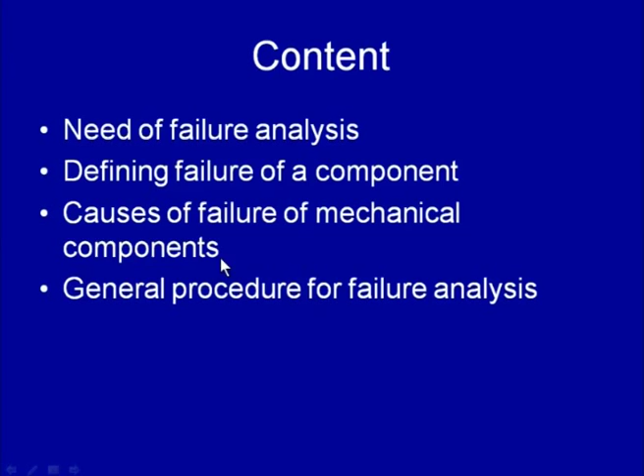So we will be starting with this presentation, which will comprise the need for failure analysis. This is the first part, and then defining failure - when can we consider that a component has failed - and the causes of failure of mechanical components, and the general procedure for failure analysis. In this presentation, mainly we will be taking up the approach used for failure analysis of mechanical components, and especially the metallurgical failure of mechanical components.

So why do we need to carry out failure analysis? We know that whenever failure of an engineering component takes place, services are disrupted, and the public does not get those services on time as per requirement. So to avoid such reoccurrence of failures of engineering components during service, it becomes important that a thorough investigation of the failure is carried out, so as to establish the primary factor or other important factor that has contributed towards its failure.

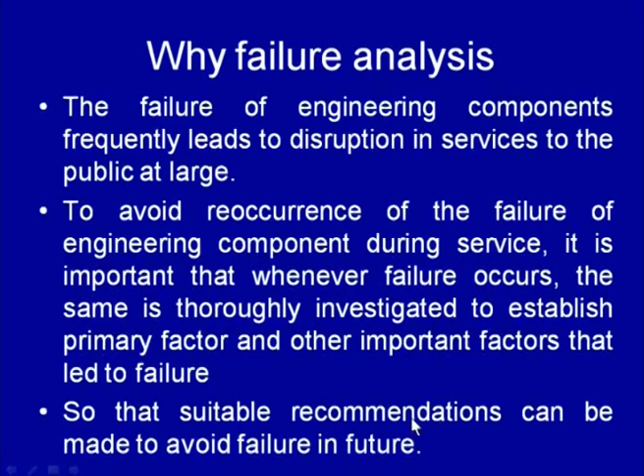And once it is established which factors have contributed towards the failure of a particular component, proper precautions can be taken to avoid the recurrence of failure of that kind. Once the failure investigation reveals the primary causes and important factors that have led to the failure of a particular component, suitable recommendations are made so as to avoid their failure again in future.

What it involves is basically a systematic approach or step-by-step methodology used in failure analysis, which helps in establishing the sequence of events which have led to the failure. At the same time, it also helps in establishing the primary factors and causes which have contributed towards the failure of a particular engineering component. So failure analysis is a systematic approach of investigation to establish the important causes of failure, and to do this it becomes worth familiarizing ourselves with the fundamental causes of failure of mechanical components, and the general approach we can use for failure analysis and prevention.

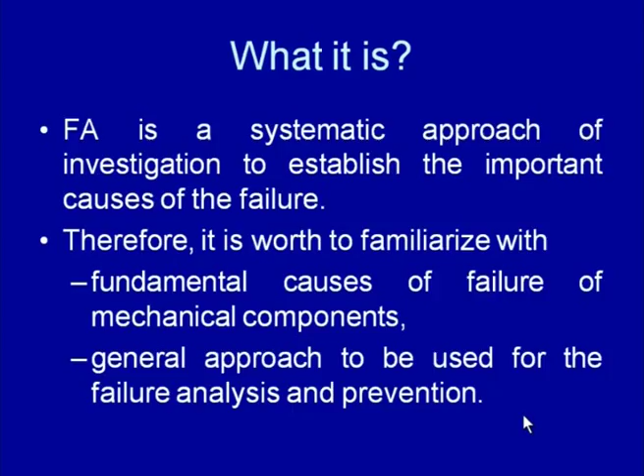So the fundamental causes of failure of mechanical components - there are certain factors that usually contribute towards the failure of mechanical components, and it becomes important to know what those factors are. These factors are mostly related to the design of the component, the material used for fabrication of that component, the manufacturing process used for development of that particular component, the processing parameters used for manufacturing that component, and the service conditions under which the component has performed and subsequently failed during service.

So it becomes important to look into the mechanical component which has failed, and what are the common causes as far as mechanical failure is concerned. So we will be talking about some fundamental causes of failure of mechanical components. Apart from that, we will also be looking into the step-by-step approach used for failure analysis of any metallurgical failure of a mechanical component.

So, in general, an engineering component or assembly is considered to have failed under the following three conditions. What are the situations when we can say that a particular assembly or component has failed?

There can be three kinds of situations when a particular component is inoperable, meaning it is not able to perform the intended function, then we can say that component has failed. Or when the component operates but does not perform the intended function, it is operating but not giving the desired results, then also we can say that component or assembly has failed.

Or when the use of a particular component compromises significantly with the safety and reliability during service, under those conditions also we can assume that the component has failed. For example, the crack in a particular component has grown to such an extent that its further use can compromise the safety and reliability of the component in service. Therefore, either it should be repaired properly or replaced in time.

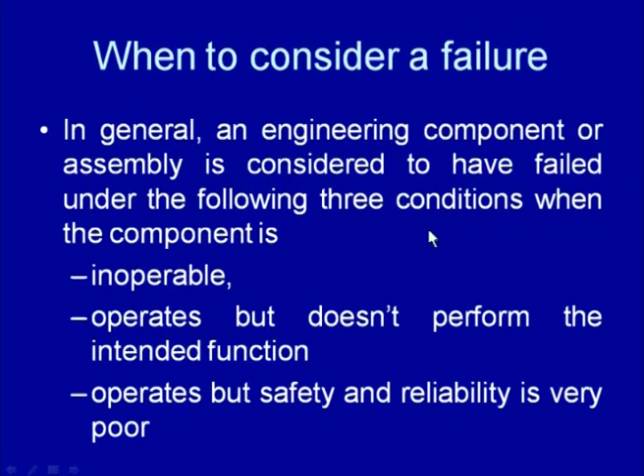So these are the three conditions under which whatever kind of component it is, whether it is a weld joint, a part, or a particular assembly, the component can be considered to have failed. As far as mechanical or metallurgical failure of the mechanical component is concerned, there can be three or four kinds of situations where we can consider that metallurgical failure has taken place, and it can occur in many ways.

Say when the weld joint or mechanical component is subjected to elastic deformation beyond the acceptable limits, and this is adversely affecting the performance of the component during service, or it is going beyond the acceptable limit of plastic deformation, meaning the loading is such that the component is being deformed plastically beyond the acceptable limits and adversely affecting the performance of the engineering component, then also we can say that metallurgical failure has taken place.

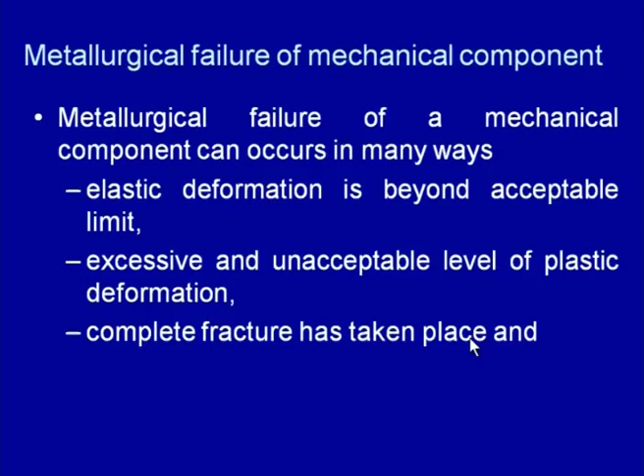And the third situation is where complete fracture of the component has taken place during service, either due to sudden load, cyclic loading, or overloading of the component. In this case, complete separation of the component into two or more pieces takes place.

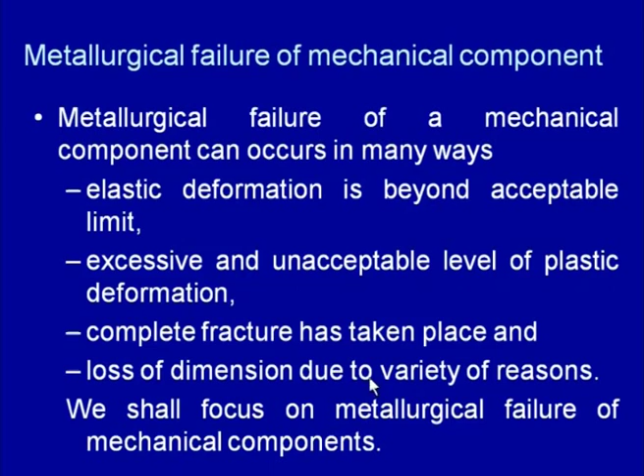There may be one more situation where during service the component loses its dimensions due to a variety of reasons, mostly related with wear, like the component being subjected to adhesive, abrasive, solid particle erosion, cavitation, corrosion, or variety of forms of wear commonly encountered by mechanical components during service. All these can contribute to changing the dimensions of the component, and the loss of dimensions beyond the acceptable limits can lead to malfunctioning of the component during service. So then also we can say that the component has failed.

In this particular presentation, mainly we will be focusing on the metallurgical failure of mechanical components.

As far as causes of failures are concerned, these are the fundamental causes of failure of the mechanical component. We know that we have a very wide range of engineering components made of a variety of materials using a variety of processes, used in very different and wide ranges of service conditions. Because of this, we need to consider that for failure analysis of each component which has failed, a unique approach is adopted.

So the failure of the engineering component under actual working conditions can occur due to a very large number of factors, which can be related with the design of the component, like there may be a design deficiency because of which it could not perform under the given load or service conditions. Or there may be deficiency related with the materials, like the material is not able to withstand the service conditions, and this can lead to premature failure of the component or weld joint during service. Then the manufacturing process may not be efficient or as per recommendation.

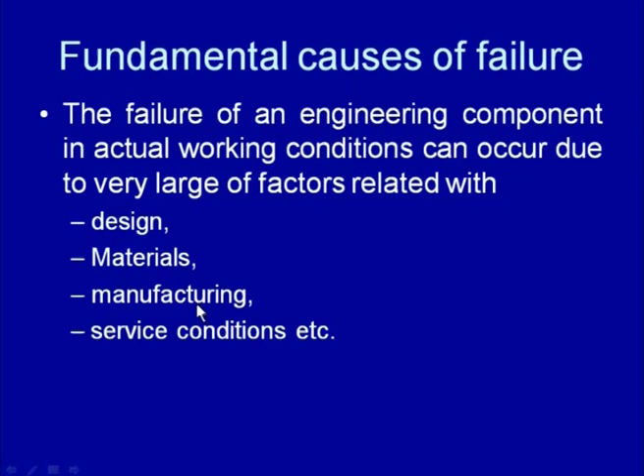For example, if it was recommended that for aluminum welding, helium or argon should be used, but instead carbon dioxide with some percentage of oxygen is used, that can lead to a number of discontinuities and defects in the weld joint. So there can be various situations where manufacturing-related process parameters introduce discontinuities in the weld joints and the component being manufactured, and that can be the source of failure of the component.

And the service conditions also vary, ranging from very steady loads to fluctuating loads at room temperature, then low temperature to very high temperature conditions, under very normal environmental conditions to very severe corrosive or saline environmental conditions.

Due to the wide range of service conditions, if the component has not been designed and has not been made using the correct kind of material, then its premature failure can take place due to the abnormal service conditions experienced by it during service.

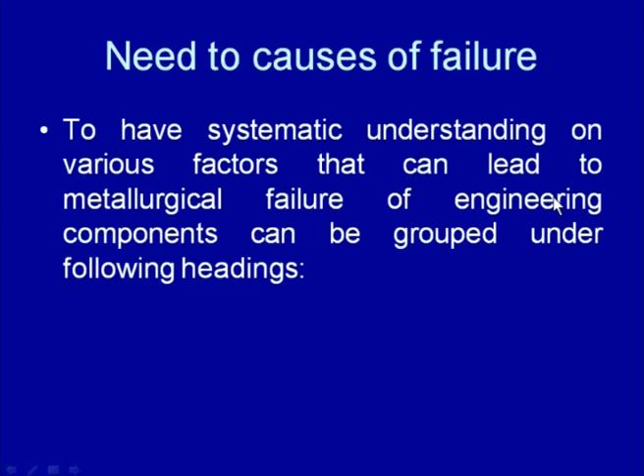Why should we go through these fundamental causes of failure? Because it is important to see what are the basic factors related with mechanical components that frequently contribute towards failure. If we have systematic understanding of the various factors that can lead to metallurgical failure of an engineering component, we can give systematic thought to what contributes to failure, and that can help us in systematic investigation of a particular failure.

The fundamental factors that lead to metallurgical failure of an engineering component can be grouped under different headings. These include improper design - whatever engineering component or weld joint has been designed, its design is deficient, meaning there are a lot of residual stresses, or the material or design criteria used is not sufficient for long performance of the component during service. There may be a variety of things related with deficient or improper design.

Improper selection of material used for developing a particular component - it is not appropriate because of its inability to withstand the service conditions which will be experienced during service, and that can lead to very premature failure of the component. Many times this is due to lack of awareness about what kind of service conditions and stresses will be acting on the component during service.

Those factors lead to improper selection of material for development of a particular component, or defects and discontinuities present in the material itself - meaning the material being used for developing a particular assembly or component is defective, and inherently has discontinuities, like the presence of inclusions in large quantity in steel sheets causing lamellar tearing. So those are the kinds of problems related with the presence of discontinuities in the metal itself.

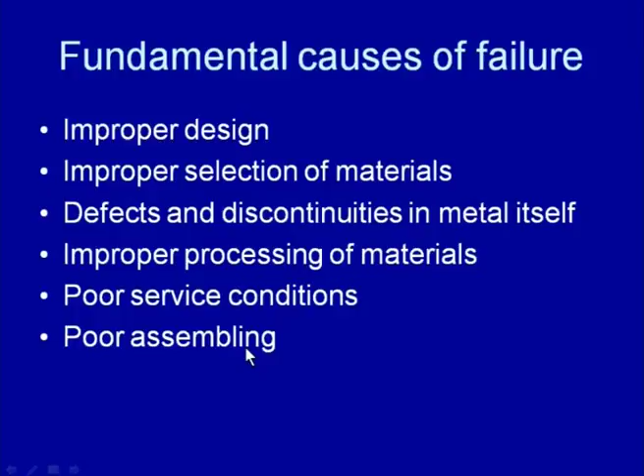Then poor assembling - in absence of proper assembling procedures, or due to carelessness on the part of workmanship or the workers involved, this leads to improper alignment or improper fit between matching components.

If those things are present, that can lead to the premature failure of the component. Poor maintenance, or an improper maintenance schedule, is also a factor - either it is not there, or if it is there, then it is not clear what is to be done, who will do it, what he will check, and how it will be done. So lack of strategy about maintenance also leads to the failure of many mechanical components, especially where there is relative movement between the components involved.

Then each factor will be taken up one by one as far as the fundamental factors contributing towards the failure of the component. The first one is deficiency in design - how that can lead to the failure of a particular component, whether it is a weld joint or an engineering component. If its design is deficient, then under the service load conditions it can lead to failure.

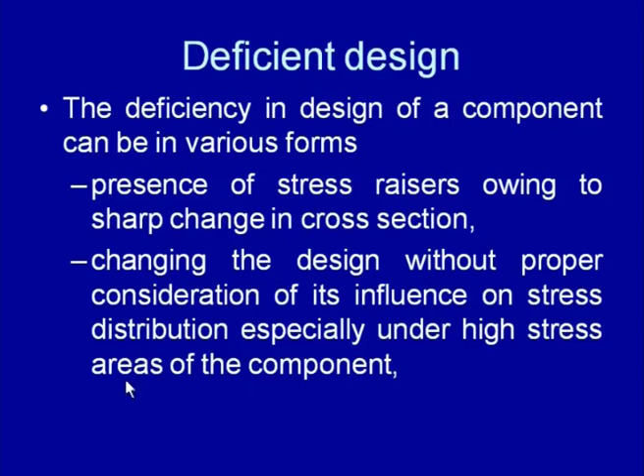So those kinds of stress raisers must be avoided. Then there is changing the design without proper consideration to its influence on the stress distribution, especially in high stress areas. This can be modifying the design of the component without giving proper thought to how it can affect the stress distribution. If the stress distribution is modified unintentionally in high stress areas, it can become a source of high stress concentration and a source of failure, because it will be nucleating cracks easily in those areas, and once a crack is nucleated, it can lead to failure easily.

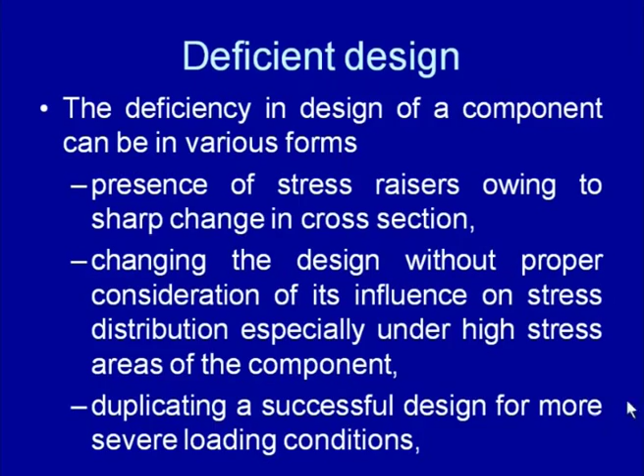Another possibility is that one design is very successful for one set of conditions, and if the same design is duplicated for more severe conditions, it can also fail under those severe load conditions, because it was not designed for them - it was designed basically for somewhat lower service conditions. Under the lower level of service conditions it was successful, but if the same design is duplicated without giving full consideration to the kind of stresses generated under severe load conditions, it can lead to the premature failure of the component as far as deficient design is concerned.

Then the design is developed without full knowledge of the stress conditions due to the complexity of the geometry. Some designs are so complex that it becomes difficult to really understand the magnitude and nature of the stresses in a particular area, and how the sizing of the component can be done. So under those conditions, when it is difficult to find out the actual stress conditions that will be experienced by the component under external load due to the complexity of the geometry, then failure of those components can be expected.

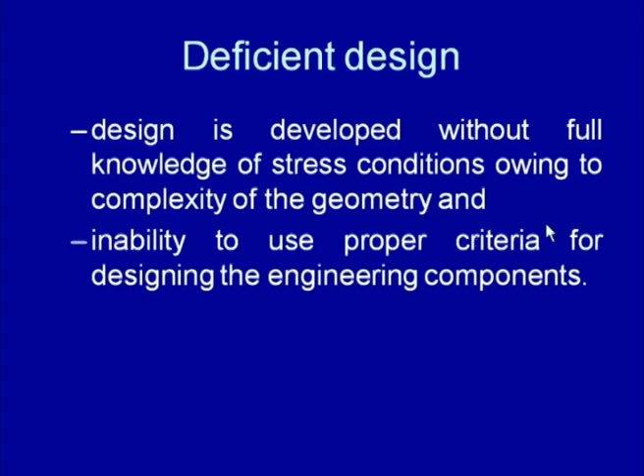And then there is inability to use the proper design criteria. If the service conditions are unexpected, or the designer is not very much aware of what kind of conditions can be expected during service for a particular engineering component, then he is not able to really select the proper design criteria for developing the design. If so, it can lead to premature failure, especially under conditions when the component encounters severe service conditions for which it has not been designed.

Then another important factor that can lead to the failure of an engineering component or weld joint is improper selection of material. Selection of material for developing the design of a mechanical component, in light of the operating conditions, should be based on the failure mechanism - which material should be selected should be based on the particular failure mechanism it may be subjected to. There will be a particular mechanism through which the component is more likely to fail than others, and that will be governed by the kind of service conditions to which it will be exposed. These failure mechanisms can be ductile or brittle failure, creep, fatigue, corrosion, or various forms of wear like abrasion, adhesion, erosion, etc.

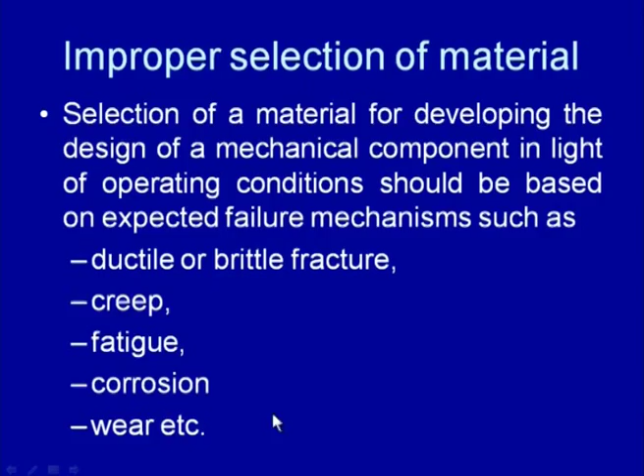So material should be designed keeping these requirements or the failure mechanisms which can contribute towards the failure of the component in mind. These expected failure mechanisms should be kept in mind while selecting the suitable design criteria and selecting the suitable material for developing the design of a particular mechanical component.

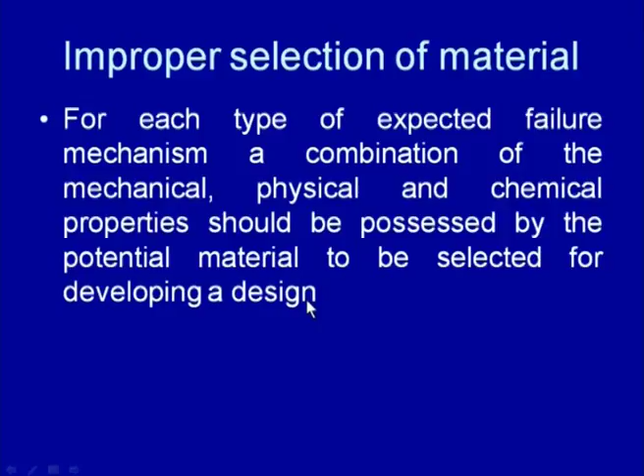For each type of expected failure mechanism, a combination of mechanical, physical and chemical properties are expected to be there in the material being selected for developing a design. Based on the kind of expected mechanism of failure, the material to be selected should have a certain set of properties. Therefore, it is important to consider what is the expected failure mechanism for a particular component during service, and that is kept in mind while selecting the particular material.

For example, if the failure of the component is expected to occur by excessive plastic deformation at room temperature, then yield strength should be used as a criteria. And if it is expected that failure will occur at high temperature due to deformation at high temperature, then creep resistance should be used as a criteria for selection of the material.

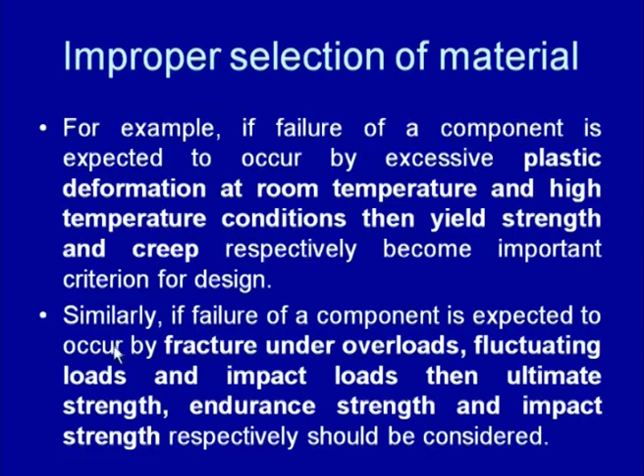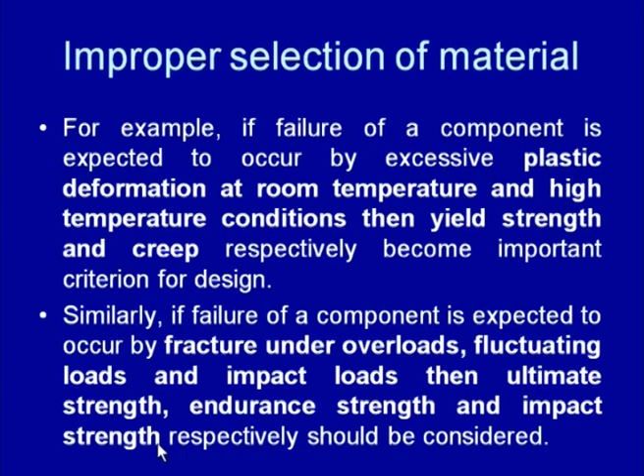Similarly, if the failure of the component is expected to occur by fracture under overload, or fracture under fluctuating loads, or fracture under impact loads, then the ultimate strength, endurance strength and impact strength respectively should be considered for selecting the suitable kind of material.

For example, if the material is expected to fail by ductile fracture, then yield strength should be the design criteria, according to the yield strength in tension, compression, shear, depending upon the nature of the load which can act on the component.

Then for brittle fracture, if brittle fracture is a possible criteria, then fracture toughness like K1C, notch toughness, ductility and ductile to brittle transition temperature should be considered. This is the particular temperature at which there is a sudden change in the toughness of the material, and it decreases abruptly from a high value to a low value. That temperature band at which the sudden change takes place is called the ductile to brittle transition temperature.

Then fatigue—if the component is expected to fail by fatigue, then the endurance limit and fatigue strength of the material with the stress raiser should be used as a design criteria, and hardness should also be considered, because it dictates significantly the crack nucleation and growth stages of fatigue fracture.

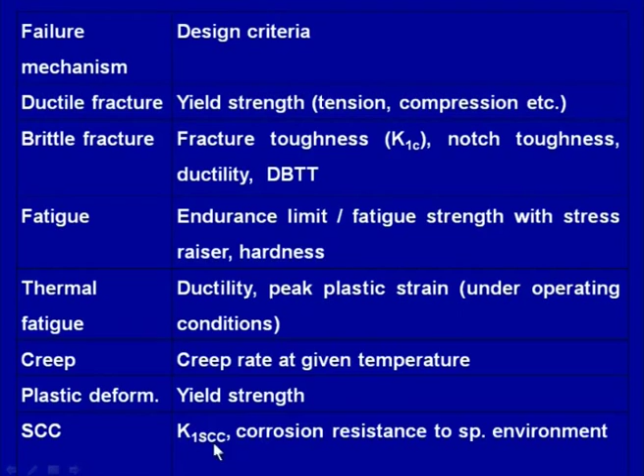Then thermal fatigue—for thermal fatigue we need to consider the ductility and the kind of plastic strain experienced for a given range of cyclic temperature variation occurring during service. Then creep—if creep is the expected failure mechanism, the creep rate at the given temperature should be considered. For plastic deformation, yield strength should be considered. And for stress corrosion cracking, the K1 SCC, that is the stress intensity factor in the stress corrosion environment, should be considered, along with the corrosion resistance to the specific environment in which the component is expected to operate.

So, based on the expected failure mechanisms, the suitable material should have the desired set of properties so that it can perform successfully during service.

But if we are not able to do that, sometimes deficiency in material selection can occur due to reliance on tensile data. Many times we find that the properties of the kind of material which is available, or which is a potential material, do not include the properties desired.

For example, creep resistance, ductile to brittle transition temperature, fatigue resistance or impact resistance—the properties of the particular material to be selected are not available with respect to the design criteria. So most of the time we rely on tensile data related to the material for its selection, and this reliance on tensile data is found insufficient, especially for the successful performance of the component. Therefore, it becomes important that the material to be selected must be characterized for the properties important for the performance of the component based on the design criteria.

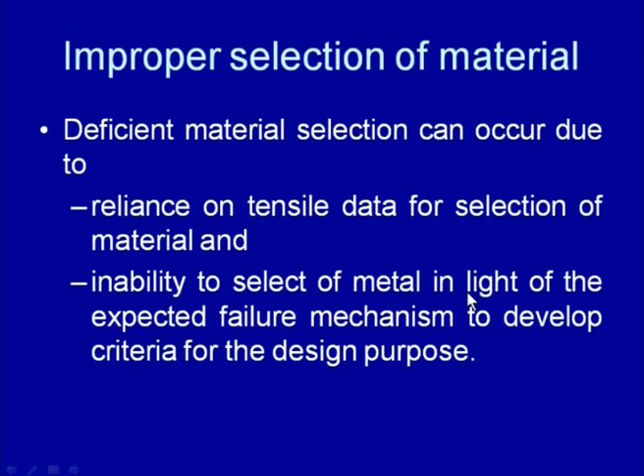The second factor is the inability to select the metal in light of the expected failure mechanism, to develop the criteria for the design purpose. This means we are not able to finalize or decide which will be the most expected failure mechanism under the given service conditions, and that can also lead to inappropriate selection or deficiency in material selection. So these are the two important factors that lead to improper selection of material.

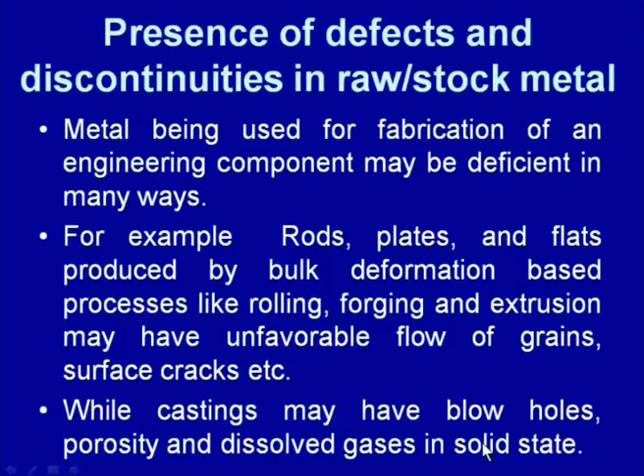Then there is the presence of defects and discontinuities in the raw stocks. Raw material in the form of sheets, rods and ingots is developed using a variety of processes, and these rods, plates, flats produced by bulk deformation processes like rolling, forging, extrusion etc. many times have unfavorable features in the form of undesirable grain flow direction, surface cracks, inclusions, laminations etc. In case of castings, these discontinuities are present in the form of blowholes, porosity, dissolved gases. If these components with discontinuities are used for developing other engineering components subjected to mechanical loads and other service conditions, the presence of these discontinuities in the raw material itself can lead to premature failure of the engineering component.

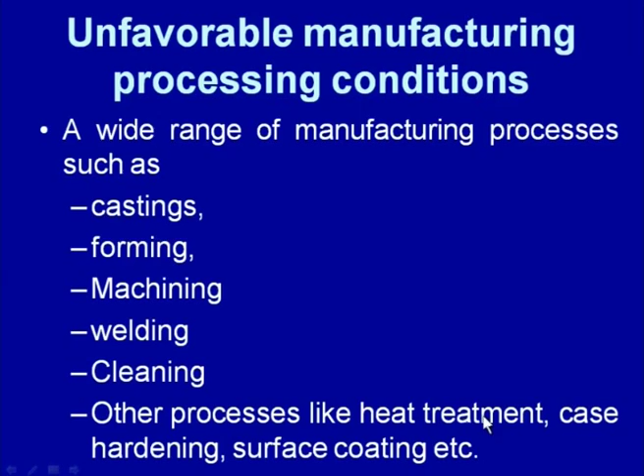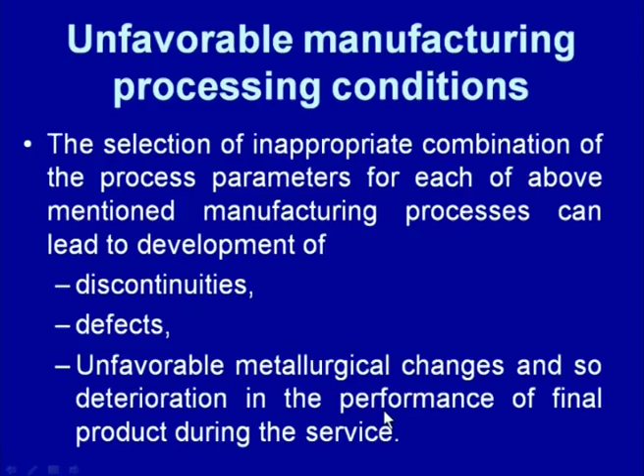Then there are unfavorable service or manufacturing processing conditions. A wide range of manufacturing processes are used for developing engineering components, such as casting, forming, machining, welding, cleaning, and other processes for property enhancement like heat treatment, case hardening and surface coating. Inappropriate selection of processing parameters related with these manufacturing processes can lead to the development of undesirable features in the engineering component, and those undesirable features frequently form the source of weakness or stress regions and initiate fracture. So selection of inappropriate combinations of processing parameters for each of the above mentioned manufacturing processes can lead to discontinuities, defects, and unfavorable metallurgical changes, resulting in undesirable mechanical properties, or these discontinuities form the source of weakness and nucleate cracks and help their propagation, especially under external load conditions, leading to premature failure of the component.

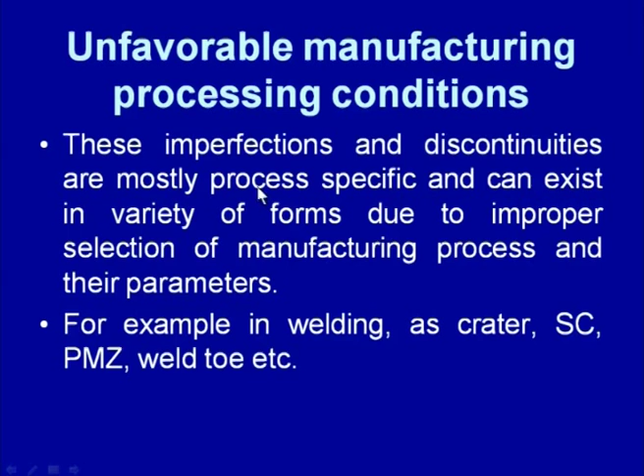These imperfections and discontinuities are mostly process specific and can exist in a variety of forms due to improper selection of the manufacturing process and its parameters. For example, in welding you mostly find craters, solidification cracking, cracks in the partially melted zone or weld toe. These are typical features associated with welding only, while in castings we find blowholes, porosity, piping defects, and in forged components there may be surface cracks and undesirable flow of grains. So many discontinuities and defects are process specific, and they form the basis for either stress concentration or easy nucleation of cracks and fracture of the component.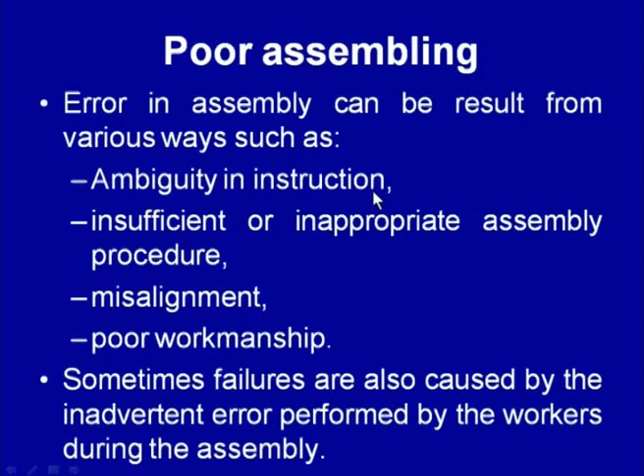Poor assembly can be a source of failure, mainly due to misalignment or inappropriate assembly procedure used for putting different items together, or poor assembly developed due to ambiguity in instructions used for assembling the component, or poor workmanship. If these features are present, improper assembly will lead to malfunctioning of the component, which can lead to premature failure of the component during service.

Sometimes failures are also caused by inadvertent errors performed by workers during assembly. If everything is fine as far as the procedure is concerned for developing the assembly, but carelessness on the part of the worker or an inadvertent error performed by the worker can lead to deficiency in the assembly.

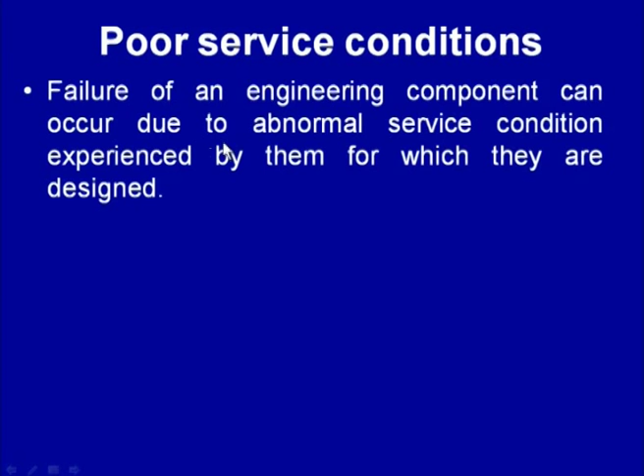Many times the failure of an engineering component can occur due to abnormal service conditions experienced by them, for which they were not designed, and these may be in the form of exposure of the component to excessively high rate of loading. This factor is mainly related with conditions experienced by the component during service for which it has not been designed, and as soon as it encounters conditions for which it has not been designed, failure is promoted.

So, the exposure of the component to abnormal service conditions can promote failure of the component due to poor service conditions. These poor service conditions may be in the form of excessive high rate of loading, leading to embrittlement of the component, unfavorable oxidative, corrosive and erosive environment, leading to either degradation of material dimensions over time and developing stress raisers on the surface of the component, or exposure of the component to excessively high or low temperature conditions for which it has not been designed.

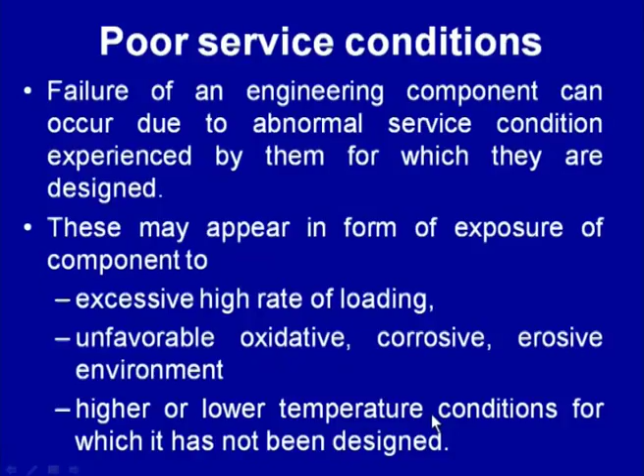Exposure to high temperature leads to deterioration in mechanical performance, which can lead to failure due to either elastic or plastic deformation or complete fracture. Similarly, exposure to lower temperature can lead to catastrophic failure due to loss of toughness of the material, especially in case of weld joints.

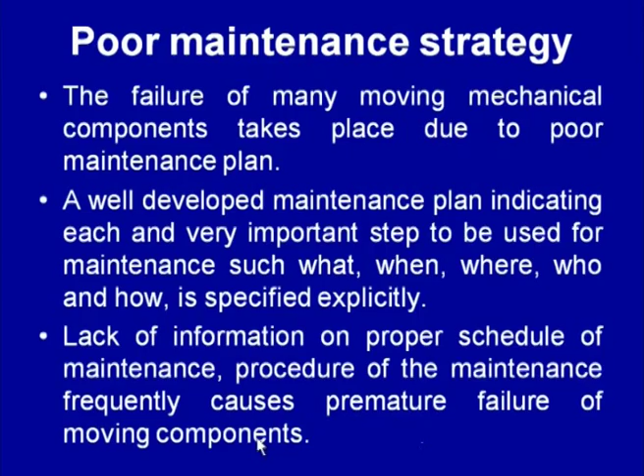Now, we will be talking about the general procedure used for failure analysis. After going through these fundamental causes, we will be able to know that if failure of a particular engineering component is taking place, we would like to see whether its design was perfect, whether proper material has been used, whether the manufacturing process has been proper, whether service conditions to which it was exposed were correct, or whether proper maintenance and proper assembly were done. So these causes will help us look into the different ways that could be the reason behind the failure of a particular component.

So understanding the different fundamental causes of failure of the mechanical component will help significantly in failure analysis. The general guideline used for failure analysis procedure will be discussed in some of the upcoming slides.

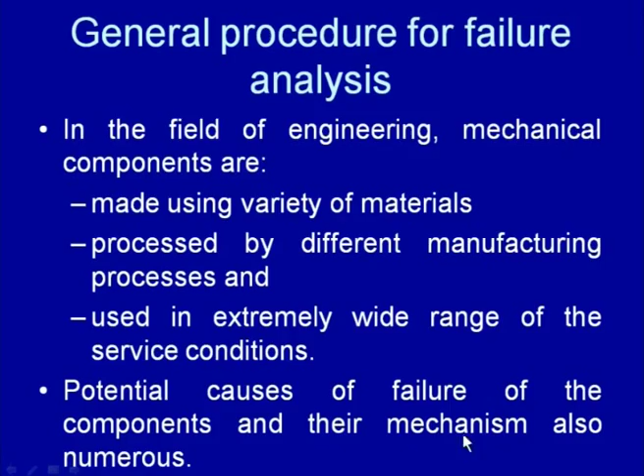We know that in the field of engineering, mechanical components are made of a wide range of materials ranging from plastics to aluminum, steel, copper, and titanium. So a very wide range of metal systems are there, and these are processed using a very wide range of manufacturing processes ranging from welding, casting, forming, to advanced manufacturing processes. And then these are used under extremely wide range of service conditions. So the kind of material, the manufacturing process being used, and the service conditions to which these are exposed are very wide, and because of this the potential causes of failure of the component and their mechanisms are also very large and very numerous.

Therefore, the procedure of failure analysis of each component should be different, and a unique failure procedure should be adopted for each failure investigation. So failure analysis procedure for each case must be developed after giving proper consideration and thought.

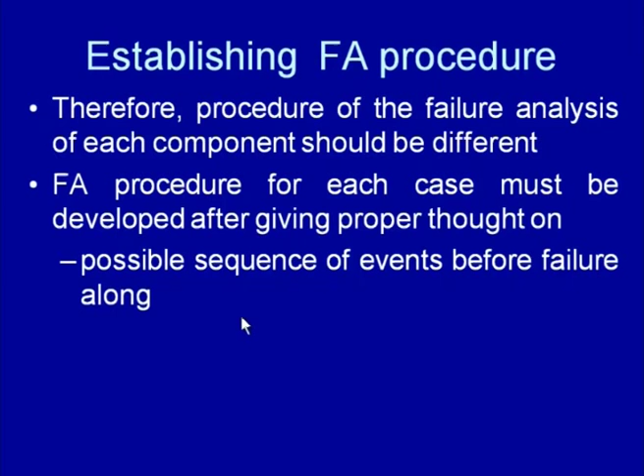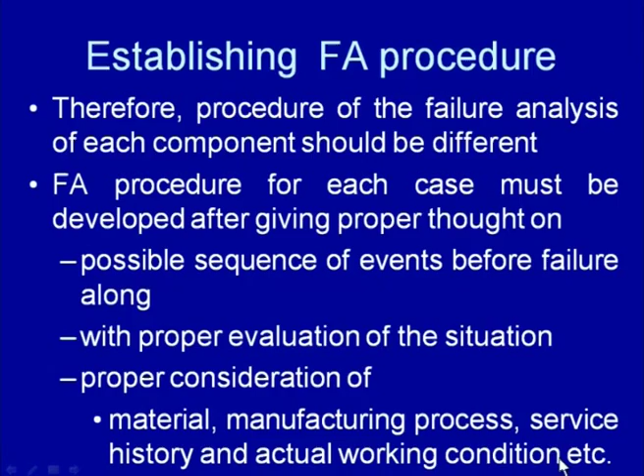We need to look into what had led to the failure of the component, like the possible sequence of events before the failure. Along with this, we need to look into proper evaluation of the situation, and give proper consideration to the material involved in the failure, the manufacturing process used for developing that component, service history of the component, and the actual working conditions under which it was exposed. So these are the things which should be kept in mind while initially chalking out the plan for the failure analysis procedure, and each case must be given proper thought to these aspects before going ahead with the failure analysis.

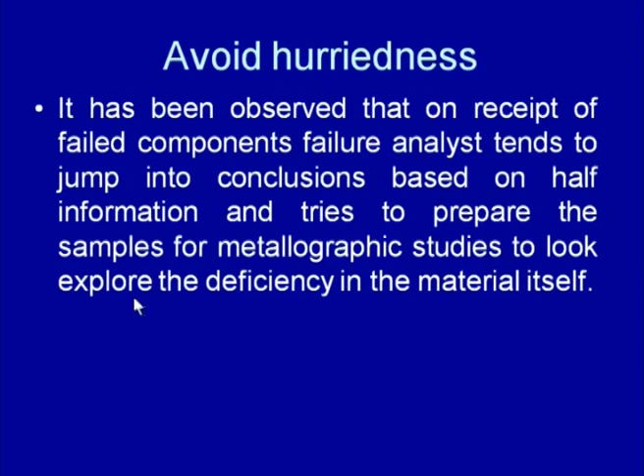Because of this, one precautionary note is that hurriedness should be avoided, because it has been observed that on receipt of the failed component, the failure analyst tends to jump to conclusions based on half information and tries to prepare the sample for metallographic studies to look for or explore the deficiency in the material itself. So this is the common tendency, that the failure analyst jumps to conclusions through half information and tries to look into the deficiency in the material itself through metallographic examination.

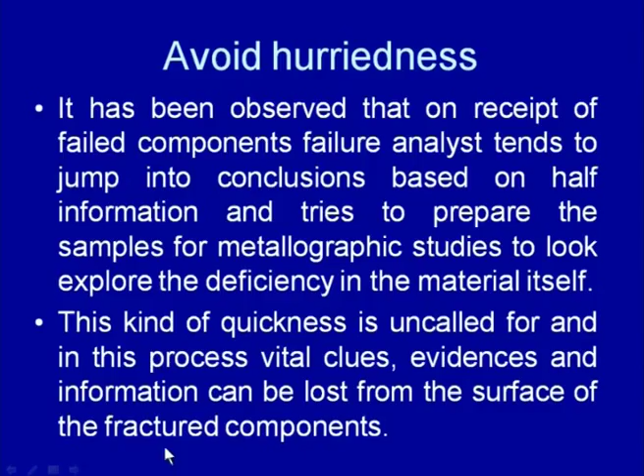This kind of hurriedness should be avoided, because once the sample is prepared, we can lose many vital clues, evidences, and information that can be present on the fractured component. In the process of sample preparation for the metallographic studies, vital clues, evidences, and information can be lost from the surface of the fractured component. So any kind of hurriedness in the failure analysis on receipt of information about the failure or receipt of the failure sample should be avoided.

So how to move ahead with this precautionary note, the step by step for the failure analysis which is there should be followed, and for that proper strategy should be chalked out based on the sequence of events which can lead to the failure, or the kind of material, the processes, and the service conditions which were involved under which the failure has taken place.

So there are 14 steps which are related with the failure analysis procedure, but these steps are very generic in nature, and it is not required that these are followed in sequence based on the need and based on the outcome of the analysis or the investigation of a particular stage. Further investigation, direction of the further investigation is decided. So the steps for the failure analysis are generic and need not be followed in a specified manner.

Moreover, the sequence of steps will largely be determined by the findings of the investigation at any stage. So say we are at a particular stage, the finding of this stage will give the indication in which direction we should move further, and one by one the various possibilities are ruled out which can lead to the failure of the component.

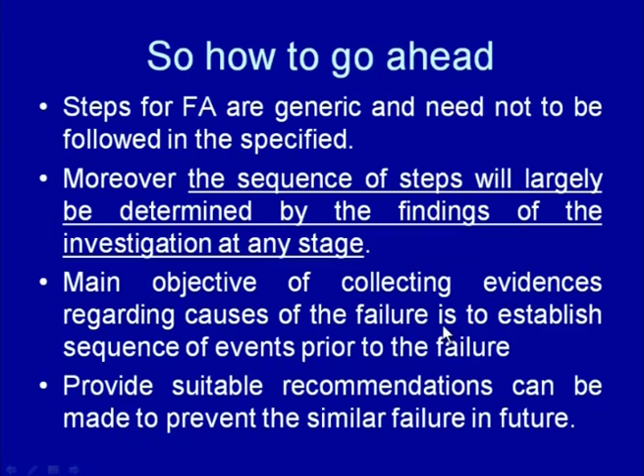The main objective of the failure analysis is to collect the evidences regarding the causes of the failure so that we can establish the sequence of events which have taken place prior to the failure. So basically the objective is to collect the information about the events which have taken place prior to the failure and subsequently led to the failure of the component. So once you are able to establish that sequence of events leading to the failure of a particular component, this will help in developing the suitable recommendations to prevent similar kind of failure in future.

So the general procedure for the failure analysis of an engineering component including weld joint will involve first the collection of background information about the failed component. In this step, basically we collect information about the design of the component, the material of the component, manufacturing procedure used for the component, and the service conditions for which the component has been exposed.

Many times all the data is not available, so whatever information and data is available from the records should be collected, so that we can be aware of what material was there and what kind of mechanical stresses it has been exposed to during manufacturing, say during rolling, forging or forming. Then what kind of thermal stresses have been given to the material, like heat treatment, welding, or any other thermal treatment, and what kind of cleaning procedure has been adopted in course of fabrication, like mechanical cleaning or chemical cleaning. Sometimes chemical cleaning induces hydrogen and can lead to the failure of the component.

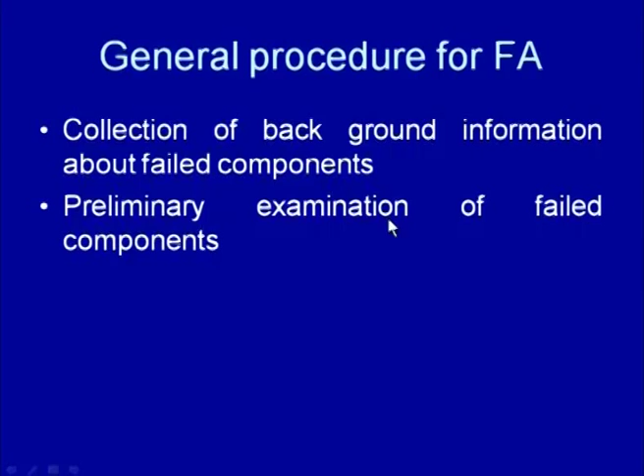So these are the kind of information collected during the preliminary examination of the failed component, and proper record of the photograph of the components where they were found just after the accident or the failure should be recorded, so that subsequently if something is found, like some sabotage was there, then that can lead to legal implications.

So in order to have the proper evidence, the proper record of the photographs of the different components, where they were found after the fracture, should be recorded.

Then the selection, preservation and cleaning of the sample. Once we know what are the different components which have been affected by the failure, and where they were found after the failure, we need to see from which location we should select the sample for the studies. So sample selection can be close to the fracture surface or away from the fracture location.

For this purpose we can use mechanical or thermal methods. If thermal methods are used, then the location of the cut should be away from the location of interest.

Then the preservation of the component. Many times we find that after the failure the samples are in very bad shape with a lot of dust, dirt, oil, burns, etc. So all those things should be preserved, because these can give important clues or information or direction for further investigation.

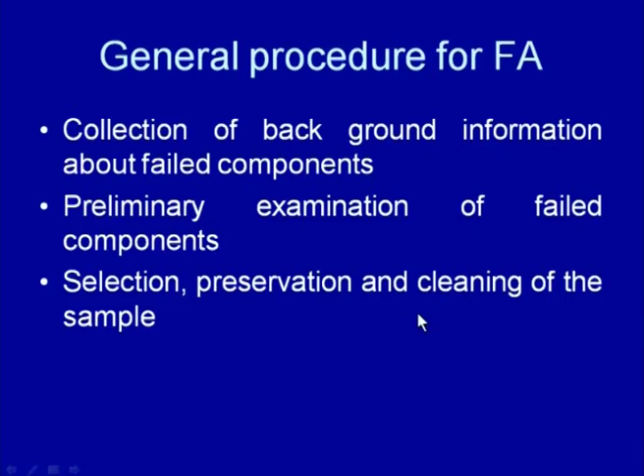So effort should be made not to clean them, but if cleaning is required, dry air can be used for the cleaning purpose. Whatever impurities or things are present on the fracture surface should be preserved for subsequent analysis, because these can give important direction in the failure investigation.

Then assessing the presence of discontinuities and defects in the failed component by NDT. Once we get the samples from the failed component, these samples can be from the fracture surface, meaning locations close to the fracture surface, or from locations away from the fracture surface.

So we can perform non-destructive tests like the dye penetrant test, magnetic particle test, radiographic test, or ultrasonic test, in order to investigate if any internal discontinuity is present in the failed component, or if the component is deficient.

Because if the discontinuities are present even in locations away from the fracture surface, that will indicate that the material itself was deficient or having discontinuities.

So to establish the presence of any discontinuity, we can perform the non-destructive testings onto the samples which have been taken from both the locations, whether close to the fracture surface or away from the fracture surface.

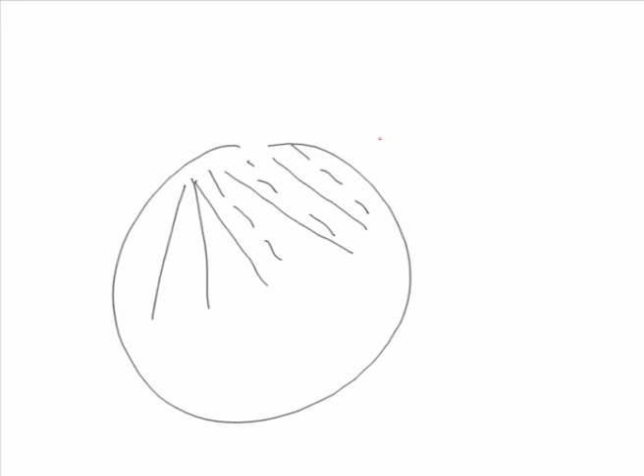So the macroscopic observation will give idea about the stress state under which failure has taken place, the location from where failure has taken place, the fracture initiation site, and the direction in which the crack has propagated. These information cannot be observed using microscopy. Only macroscopy can give us this vital information, or if something else is present like paint, oil, or oxidation on the fracture surface has been observed, it will indicate how long this crack was present, which might have contributed towards the failure.

Then the microscopic examination will indicate the kind of microscopic mechanism which was involved in fracture of the component. These mechanisms are mainly of 4 kinds, like dimple fracture, where very conical shaped cavities on the fracture surface are observed. The dimple fracture is one which will show whether the fracture is ductile or brittle. The dimple fracture indicates ductile fracture.

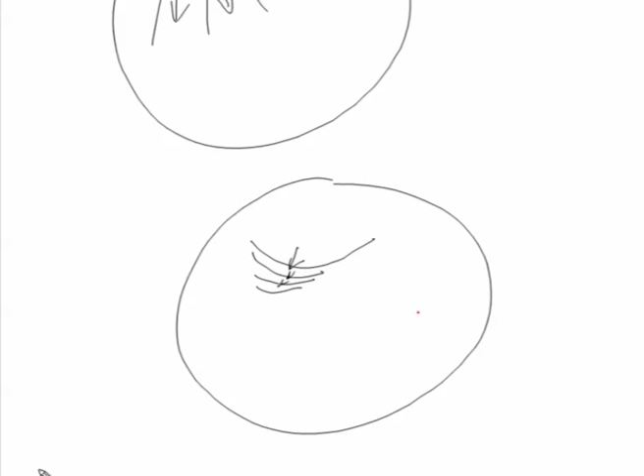Then typical striation marks on the fracture surface are also observed. If this is a component which has failed by fatigue, we will be able to see, step by step at microscopic level, concentric circles being developed, indicating the presence of striations. This is the typical feature of fatigue fracture. The striations on the fracture surface at high magnification, more than 1000x or so, will be observed in the component fracture surface which has been subjected to fatigue.

So the dimple fracture indicates ductile fracture, the presence of cleavage facets and intergranular fracture will indicate brittle fracture, and the striations will indicate fatigue fracture.

Metallographic observation of the failed sample is also done, which will show whether microscopic discontinuity is present in the material which has failed, whether the metal was of the correct kind, whether manufacturing processes were used properly, or any adverse effect occurred in the material during service, for example corrosion, decarburization, or grain coarsening. All this can be verified through metallographic examination.

Further, image analysis of the metallographic microstructure can give us information about whether grain coarsening has taken place during exposure, or the kind of microstructural features present in the component.

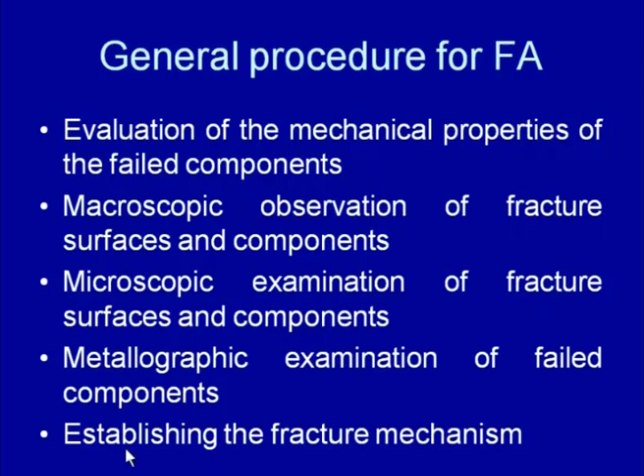Then establishing the fracture mechanism: if a defect was already present in the material or component, then in light of the service load conditions, whether it should have failed with the presence of those discontinuities or not. Fracture mechanics basically helps establish whether a given size of crack or discontinuity should have been stable or not under the given load and service conditions, for a given set of material properties, because fracture mechanics relates the material properties, the external service conditions, and the discontinuities present in the material.

So, for a given size of discontinuity in the material, given service conditions, and given fracture toughness of the material, under given stress conditions, whether it will perform successfully or should have performed successfully - that kind of failure analysis is performed using the fracture mechanics approach.

Then sometimes we conduct tests under simulated conditions also, like if the component has failed either in very low temperature or very high temperature conditions, then in order to assess the performance of the material under those conditions, sometimes simulated tests are conducted. These are very specialized tests performed under the conditions in which the material has failed.

The simulated conditions are developed accordingly - say if cavitation is taking place under very low temperature conditions during service, then the cavitation test is conducted under those load and service conditions. Similarly, if solid particle erosion is taking place at high temperature, then we need to conduct solid particle erosion testing under those conditions. This helps us establish the behavior of the material under the service conditions to which it can be exposed.

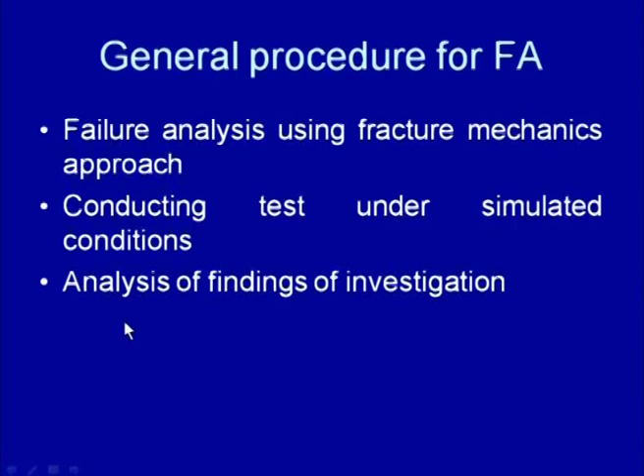Then all these findings are analyzed to see what could have led to the failure of the component, so that conclusions regarding the failure analysis can be made to identify what could have been the main causes that led to the failure of the component.

So, after analysis of the various evidences and findings of the investigation, we try to establish the sequence of events that led to the failure of the component, and this helps us establish whether there was a deficiency in the design of the component, a deficiency in the materials, or a deficiency in the manufacturing processes, assembly, or maintenance plan. So what had led to the failure of the component, that particular aspect is identified.

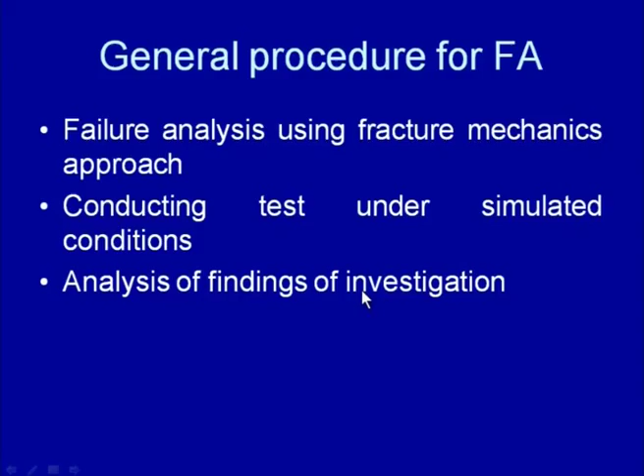So basically through this we try to identify some main factors that have contributed towards the failure of the component, apart from other factors.

Once the analysis is ready, the report is written, and the report of the failure analysis should include the important factors that could have led to the failure of the component, along with the sequence of events that had taken place before the failure. At the same time, the report should also include what should have been done to avoid recurrence of this kind of failure. So this was the last step as far as the general procedure for failure analysis is concerned.

Now I will summarize this presentation.

In this presentation, we have talked about the need to know about failure analysis and the prevention approach, and then what are the fundamental causes of failure or metallurgical failure of a mechanical component that commonly contribute towards its failure. We have also tried to see what general procedure can be used for failure analysis of a component, so that important causes of failure can be established in order to avoid recurrence of the failure.